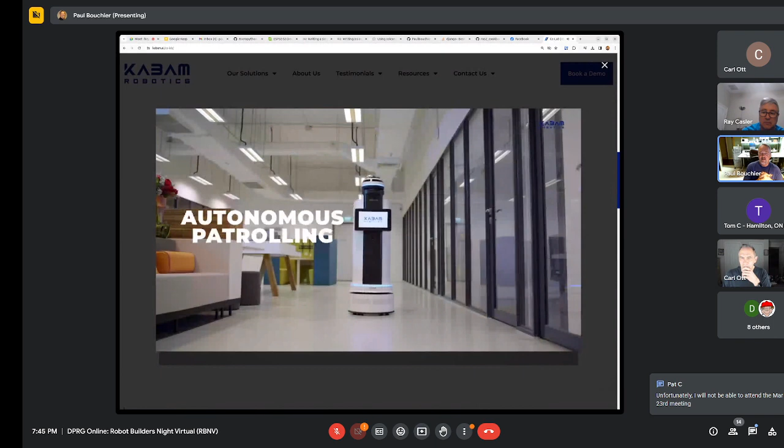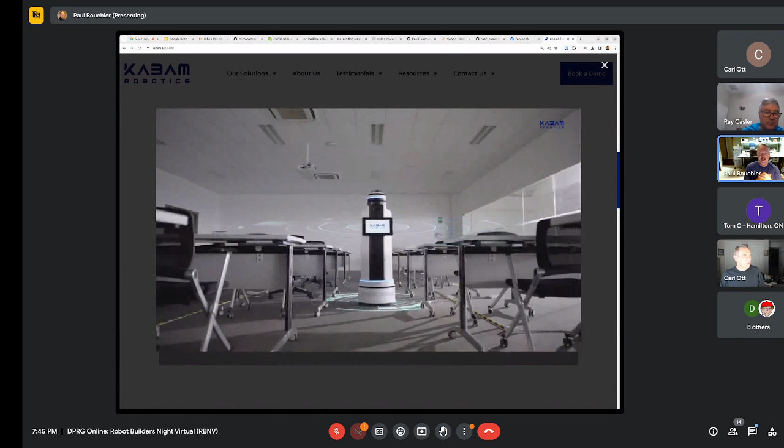An indoor and an outdoor security robot. So this is some imagery of the indoor robot, and Rob is the VP in the U.S. They're expanding their operations in the U.S. Rob is going to offer us the opportunity to tour their experience center, where they'll actually have a physical Collab, and Halo is their outdoor security robot. We'll be able to look at them, and he'll be explaining them on Saturday the 23rd.

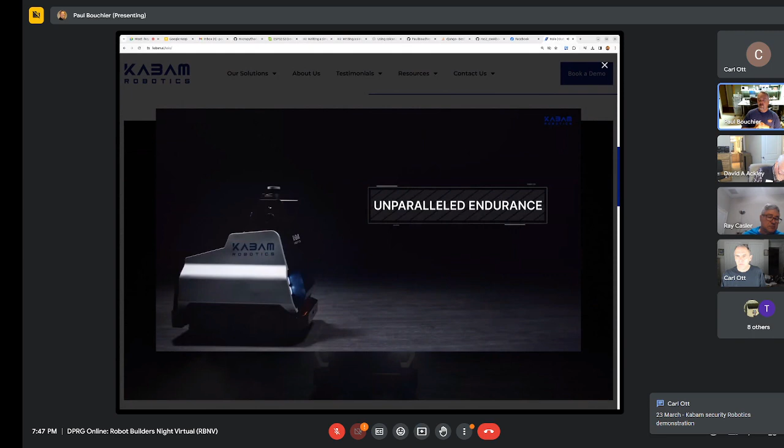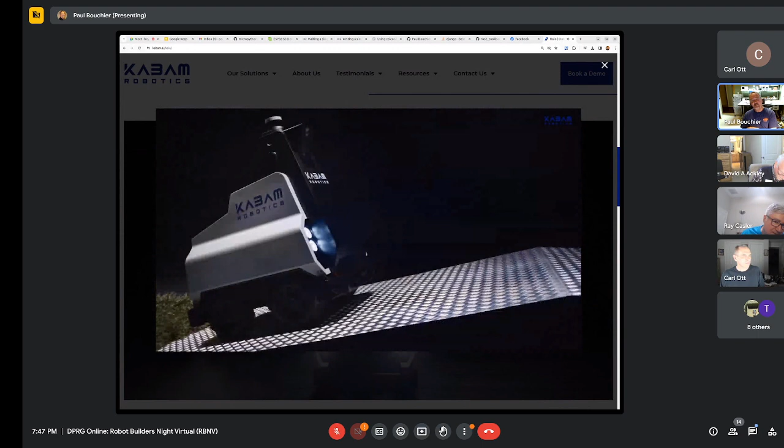Both of these robots are hosted by a back end, and you saw the word SMART popping up quite frequently—that's the name of their back end that monitors the robots, where they are, and alerts, with a whole cloud infrastructure. I think it'd be a really interesting talk. Clearly they address some of the things we try to address in our robots, things like rough terrain and navigation outdoors and indoors. I don't know any more about them than these videos, but I think it'd be really interesting to learn about them.

Is that a barrel poking out the front there? No. Maybe all too soon, unfortunately. Yeah. Does it kind of look like a Doctor Who robot, one of those Daleks? At some point, don't they all, right? If it is a barrel sticking out the front and somebody gets injured by it, is that an industrial accident waiting to happen? No operator in control, right? It's autonomous. Makes it a piece of equipment. Unless it's a Dalek, in which case it has the remnants of an organic brain inside.

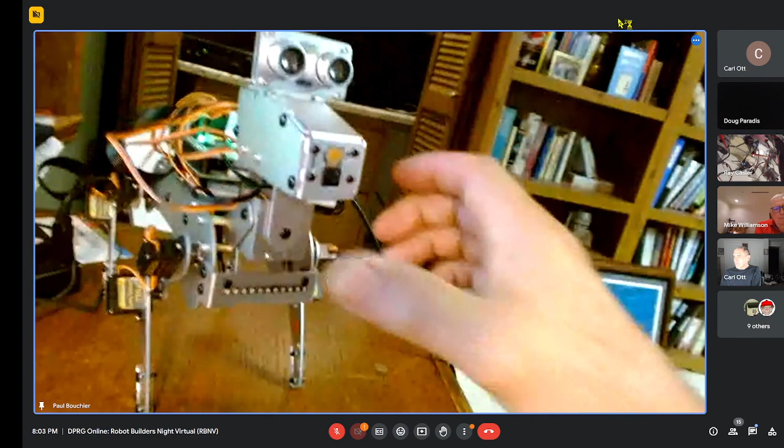So let's see, a few of the things he does are set... and responded to your command. Wow — only because I'm typing in another window. Oh okay, it does have, can do voice commands. Did you know that, Paul?

Yes. Okay, this is lie down with hands out. Let's see, the stretch is kind of fun, and then you can do push-ups. This is as far as I've got with this thing, Doug.

Can I drag it out across the carpet, or? No, it doesn't do that one. No? I would think that'd be a classic. Yeah, I know it would be.

Let me see if — have you tried to do the AI ones? No, okay, I only got it put together like the night before last, so I powered it up for the first time yesterday. Well, how about your ultrasonic, is it running? I don't know, I haven't got any — see, that's my problem right now.

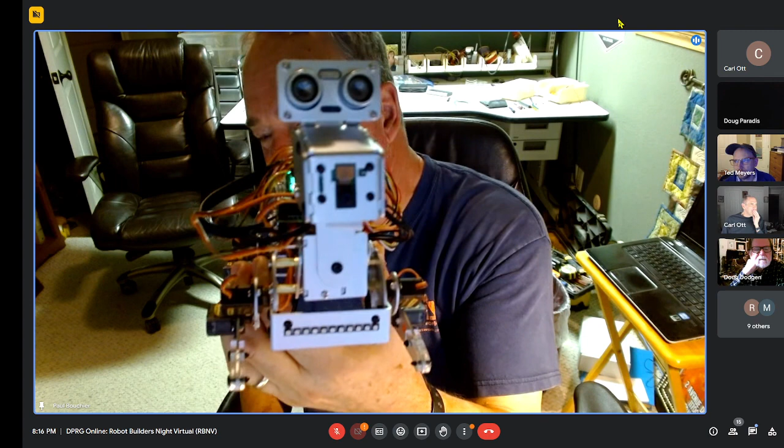Yeah, they did a really good job. You got how many, 12 servos in it? And one of them's the tail, so that's not as big a deal. They essentially, you set all 12 of them to neutral, and then you move them into a sort of sit down position like this, and they have a little program that allows you to adjust them to make incremental change in each of the different ones. I found it was necessary because the splines on the servo head don't let you set the arms exactly at right angles. So it's like Doug says, it's a kind of fine tuning mechanism, and they must store away some parameters in a file somewhere. And I was saying, considering how bad that could be, they do an excellent job in letting you set up all of those things.

Pretty cool robot. So anyway, the control software is strictly their app. You don't have access to the programming. Well, no, what they do is they provide you, I believe it's in Python, isn't it? Yes, it's in Python. So what you have is essentially a library of moves. Okay, so like go forward, you have a subroutine that's go forward. If you want to turn left, there's a subroutine turn left. And there's a subroutine to turn right. There's one for it to sit down. There's one for it to lay down.

There's one to lay down with its legs extended, one to stick its butt in the air, one to stick its head in the air and howl. I mean, about anything you would want to do, they have a subroutine for. Right, but how do you call these subroutines? Do you type into their app, or can you have a program that makes decisions? Well, it's Python, you write your program if you want it. So it's strictly Python from the command line. Yeah, I'm just saying, in theory, I'm sure if you wanted to, you could look at one of the subroutines and figure out, I mean, they're obviously passing the position of 12 servos.

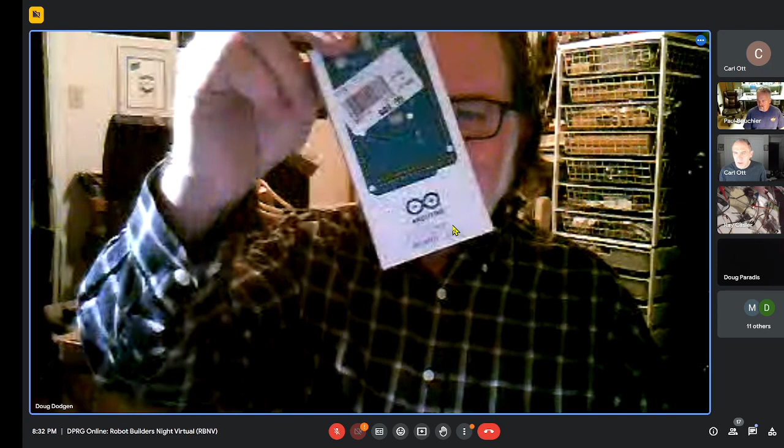I blew its serial connector on the Arduino somehow, and I went to Micro Center and got 2 more Arduinos so I could replace it. I got the Raspberry Pi 4 and Raspberry Pi 5 just on impulse, and I got this fan for cooling the Raspberry Pi 5. That whole price of stuff was about $200.

Your RoboDog is $179, and it actually does a lot more than this stuff I got in my hands here. And it looks a lot better than that thing behind me, which I've worked on, and it's kind of cool. It's version 1, and I've learned some things, but I don't know if I'm going to repair it.

I got the Mega so I could replace it and keep going. But I'm wondering, after seeing your new toy, if I can get that done by April 6th to put it on my back. That's not nearly as heavy as RoboDog over here - that's 20 pounds. I've tried it, and it's wearable, but I wouldn't want to wear it all day.

So that's my story. But yours is bigger. Bigger is always cooler. But yours is steampunk. Well, maybe I can steampunk up that other one - it's just a starter thing, you can put something over it. And Doug, yours is scratch built. Let's be clear - yours is scratch built, so there's some energy and love in that one.

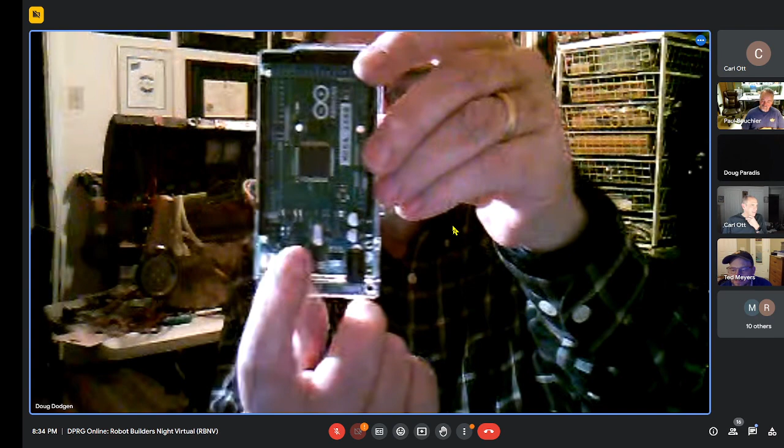Yeah, that's version 1 love. One should not minimize that. I will probably replace the Arduino just because I've got so much other stuff in there. I was so frustrated the other day - there's an RxTX light right here that shows the serial communications, and they don't work anymore on RoboDog. It quit right in the middle of a command, so somehow I burned something out there. I can just unplug that one and plug this one in, and it probably will start working immediately again.

I'm sure I will try that in a day or so. It took me a while to get over being frustrated. Every time it dies, I keep saying, well, that's the last one, let me go dig a hole. But then I keep saying, I can't give up.

That's not the kind of guy I am. Hey Doug, is everything else on it working? The rest of the dog works - it lights up, the controllers work, but the thing does nothing because it depends on the serial commands from the Pi to the Arduino to do everything.

Well, I'll be honest, those Arduino boards are pretty damn tough. This is the first time I've had trouble, but I verified it when I plugged the computer in to upload the program - it starts to upload and never finishes. Those RxTX lights never flash. On the new one I just bought, they do flash.

One thing - how are you powering it up? I have a 9-volt on the Arduino, they have this 9-volt plug-in, and I have 9 volts going to it. Okay, whenever I've had an Arduino issue, whether Mega or Uno, it's always been the LM1117 - or is it 1.7? No, 1.5. Anyway, it's the power supply chip, the linear regulator, and it goes bad.

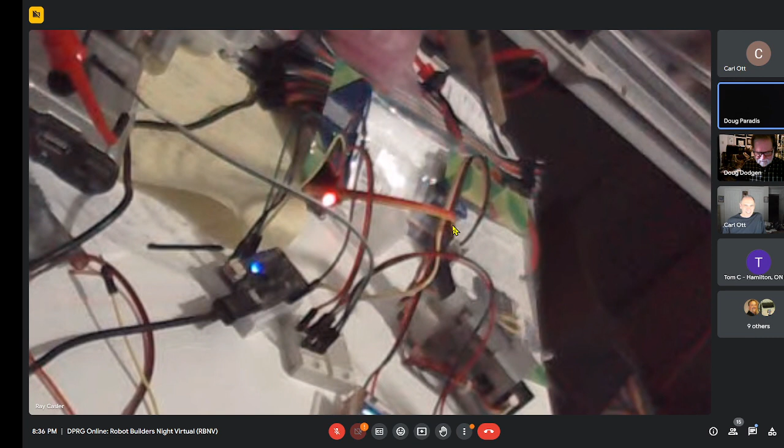$50? That may seem like a lot more to some people than it did to me. I bought 2 of them just in case I blew one out. $50? They're not $50 each, are they? Well, that's the Mega, yeah, those are pricey. Wow, but was that an official Arduino one? The full-on branded ones, yeah.

How much was your Pi 5? Yeah, I did get the Pi 5, and that was $79.99, MSRP, that's what I paid for mine. Yeah, the Pi 4 was $74.99. These were both 8 gigabytes, so more expensive than the cheaper version. I would have just gotten 2 5s.

Hey Doug, I mentioned I hear the 5 has some differences - I wanted the 4 because it'll do what I want right out of the box. The 5, I have to figure out what the changes are. Well, run it through Docker - that's what we did for the workshop. Yeah, but if you don't know Docker, that's another stair to climb.

I haven't played with Docker yet - I've thought about it but never done it. Same with ROS, I keep thinking about it but not doing it. The 5 doesn't support ROS straight out of the box, and Docker doesn't either - they don't quite have it ready for prime time. So I bought one just to play with, but I don't think I'm going to use it in anything right now. I figured as long as it's out there and they had them, I'd get one.

I've had pretty good luck with the Inland clones - they're like 20 bucks for a Mega. Where? At Micro Center. I got this Mega at Micro Center for $48.99. Yeah, but that's an official Arduino, I think. Yeah, one of the other ones.

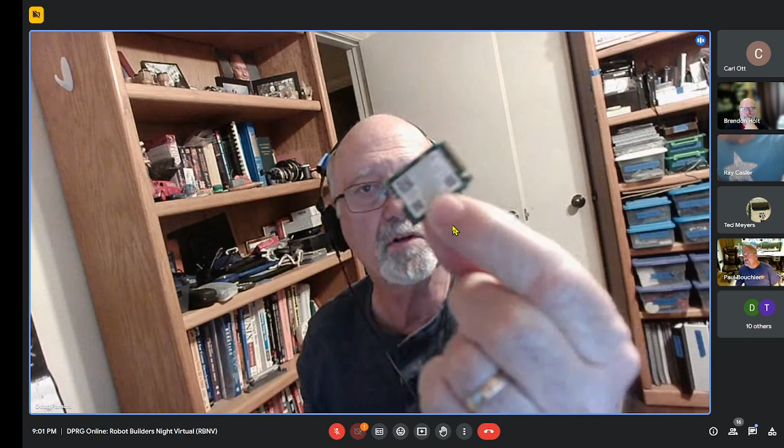Yeah, I'm using these little 2230 format boards. This one I think is 128 gig, which is fine for this stuff. But you can use, like you said, all the way up to this one. The Pimoroni will go up to a 2280, which is I think what Brendon's got. Yeah, it's full size. Yeah, and these things are only about $10, $10 to $15, so the drives are cheap.

And if you're buying them from Amazon, what you do is try to fill them up, and look at how the controller handles the cache. If you have good speed at the beginning and all of a sudden it slows down to a crawl, send that one back to Amazon. I can put a link for one that I found that's a good deal. I've bought about 4 of them for different things.

I've been using the Orange Pi 5, no matter which version you get, Pi 5B, 5, or 5 Plus, all have this port built in. The Orange Pi 5 looks like a great board, I'm still screwing around with it. But if you're used to the support you get with a Raspberry Pi, you're going to be disappointed because it's just not there, even though it looks like a great board. So anyway, I'll put that link in.

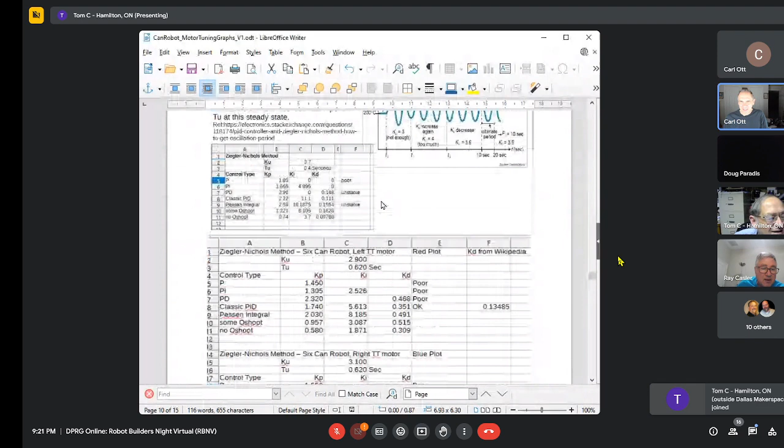Okay, this one, let's see if this will work. And it's been a few weeks since we've had a good PID loop discussion, so bring it on. Oh why not, right. You can see that, I assume. Yes, okay. I've probably talked to this group before about learning a little bit about how to use the Ziegler-Nichols tuning method a few years ago when I first started to use speed regulators on a robot, and this is the approach I started to use. I can talk about that some more later if anybody wants me to. I had a little presentation on it from when I did my tri-robot.

I applied that to the robot I'm currently working on for the 6-can contest in order to get some starting points for the coefficients for the PID loop. The two motors I've got turn out to be different, so these tables show the values that I got from applying this manual tuning method. It's one of the simpler tuning methods around, and depending upon how responsive you want the PID loop to be, you can pick various values here.

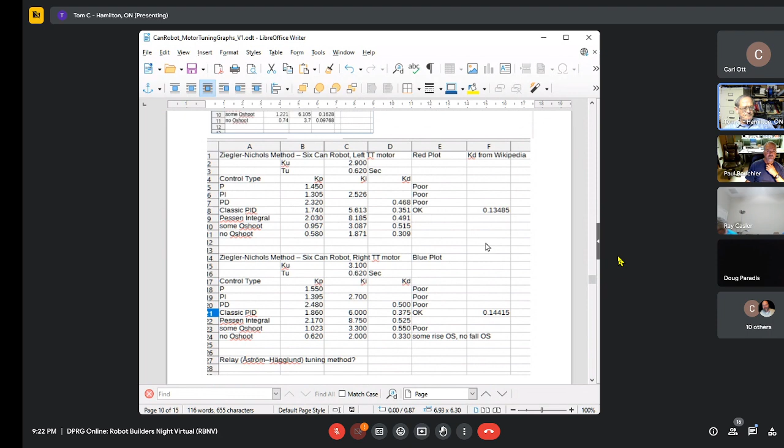I usually go through and try them all because they're fairly easy to use. They're starting points, not perfect PID parameters. When I applied them to the two motors, I got results like this. Not great - the overshoot and undershoot still need to be manually tuned out, but it produces very good responses to a step input in speed reference. So I ask it to go to 100 RPM and it goes to exactly 100 RPM. It just overshoots a bit and then undershoots when I turn it off.

So it's not bad. You can ignore the funny green lines at the bottom - that's just other things I have as I'm tuning the loops on this Arduino. It gives me a better timeline for what's happening.

So I thought, rather than mess around manually tuning these things, because I'm never very good at that, I have occasionally run across references to auto-tuning software for tuning PID loops. I thought I would look into this a little bit and see what happens. When I researched it a bit, I quickly ran across three of them.

One of them is called S-Tuner, provided as part of the Arduino library package. It looks fairly complex, so when I tried to find out more about examples of usage, the only ones I could find in all the forums were people using it in temperature control loops - closed loop temperature control, usually for beer making apparatus. That's all I could find. Nobody seemed to use it for anything else. It's pretty complicated, so I looked on a bit.

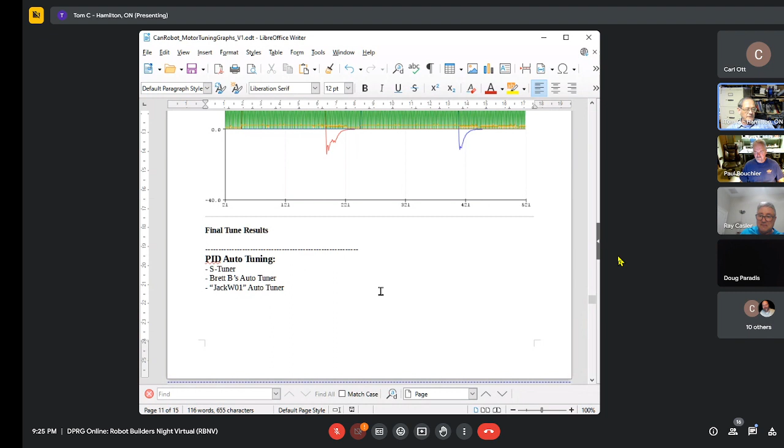So I ran across this third one, which had a few good reviews. It's relatively simple - only a small number of parameters to set up, and it was easy to add to a version of my code so I could run it as part of the software package on my Arduino. So I ran it.

When you run this thing, basically with the parameters you give it, it simply gives your motor a reference, monitors some results, turns it off, and then gives it some more references. It does this 8 times in a row. The blue line is the speed reference, and the red line is the speed measurement, which it's looking at to get some feeling for the response of the plant you're trying to control. This doesn't look bad - this looks like it's okay stuff. I ran it several times, which is why you see a couple of graphs here.

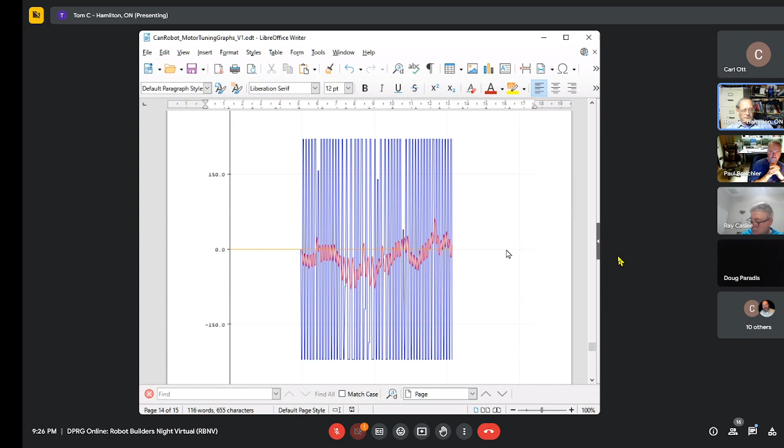So when I ran this thing a bunch of times on each of my motors and took a look at the data - here we are. I took the PID parameters for a no overshoot solution, and this is what I got when I tested my PID loop. This is horrible. This basically says, give it a reference, and the speed just goes crazy. This thing oscillates like mad. It's a highly unstable set of starting PID parameters. So I was extremely disappointed.

It kind of reinforces what I've been reading, that auto tuners are really hard to get to work right and aren't that good anyway. For what it's worth, these are the PID parameters this auto tuner gave me for a condition of basic PID, a classic PID loop, and what's called no overshoot. I used the no overshoot values and ran this multiple times. The PID values it produced seemed reasonable.

They seemed consistent at least, so I averaged them out and used the bottom set in order to test the motors. Produced really, really awful results.

So the end result here is certainly this particular tuner, which if you look in GitHub and search for Jackw01, you'll find the code and his extremely sparse write-up. I wouldn't really recommend it.

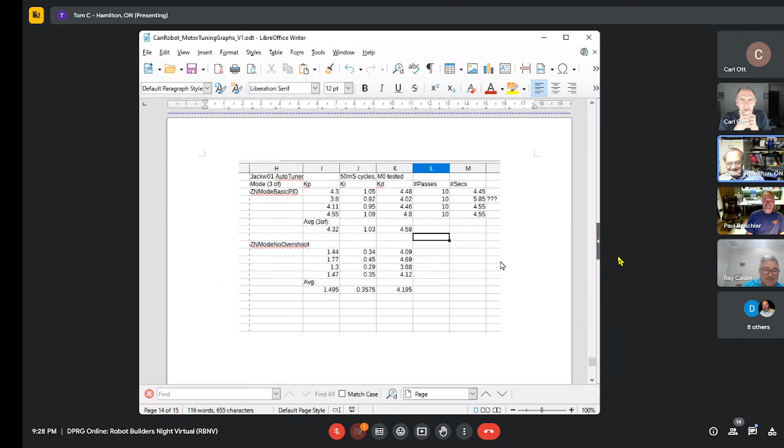That was the solution, I tried it, it fails, I don't recommend it. Tom, hey, can you back up to the last chart you showed? I'm wondering here when I look at that chart, because of the time scale, and when I see those kinds of dropouts in the blue, and I think you said the blue is the reference. Well, it makes me think you've got a sampling rate problem, because if the blue is the reference, that should be a nice, regular, clean signal, right? And if whatever you've got is not putting out a nice, clean signal, it suggests to me that either it's not sampled properly in the way that it's creating that signal, or whatever mechanism you're using to measure the thing is not measuring it right very well.

Now, Carl, this was my normal PID loop with the new set of 3 parameters in it. And when I say my normal PID loop, I mean the PID loop that produces this with the parameters I got from the manual ZN tuning method. But I still come back to the, even this, the time scale, when I see time scales that hint that something's undersampled somewhere, I wonder if the problem is not necessarily in the algorithm, but perhaps in just a sample rate mismatch.

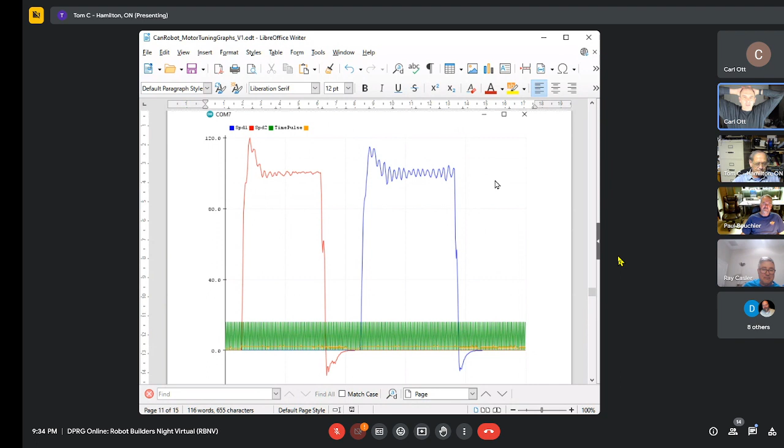Okay, but that's fine. But think about this, right? It's like a fundamental Nyquist violation, because you generally want the sampling rate of the controller measurement to be at least twice what the plant is. You want the controller to be able to control and measure much faster than the thing it's trying to control and measure can respond.

Otherwise, just think about having this wet noodle on the gas pedal of a Lamborghini or something. So your suggestion is when I run the auto tuner, I should run a much faster controller and see what happens, run the auto tuner at a much higher sampling rate than the other thing. Just put them in separate loops, right? Decouple the timing. Run the auto tuner at a much higher rate. They're two completely different programs, so I can do whatever I want.

I'm really curious, that's a good idea, Carl. I never thought of that. Got me going. Thank you. I would highly, before throwing mud at it, test it that way. And hell, if you can control it 3, 4, or 5 times faster, let's see what it does. Anyway, for what it's worth, I was a little unhappy. No doubt, yeah, so bouncing it off you guys is useful. I may actually try and run it at a faster sample speed.

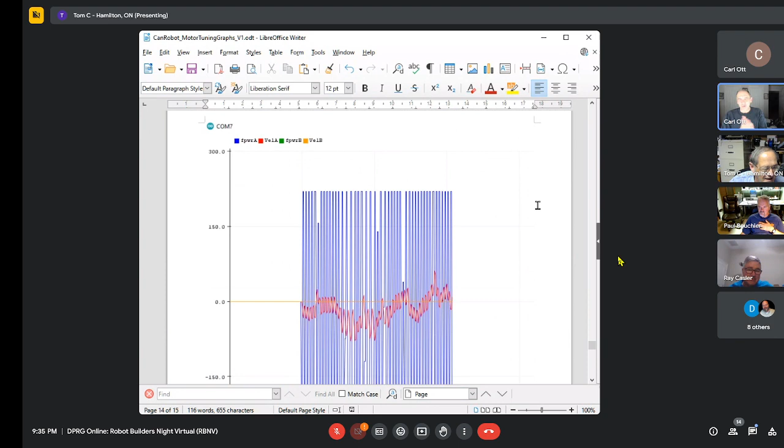Oh, this is cool. And I think that's all I've got here.

I did mess around with trying to improve the wheel encoders on my TT motors, but without particularly great success. I took the mechanical wheels - remember when mice had balls in them that rolled around, and those balls drove those lovely little encoder wheels inside, and they collected lint? Well, I pulled one of those apart and got a really nice set of wheels that fit nicely on the ends of the TT gear motors. And I pulled out the optics, the optical sensors used, which are really nice integrated units, hooked up an amplifier, got the whole thing running, and then realized that the TT motor gearbox is so sloppy that it can't keep the little tiny width of the slots lined up with the sensor.

But I took it all apart and put it back the way it was. It was a fun experiment. If the gear motors had been not so sloppy, then it would have worked out really well. But it needs quadrature encoders and a whole lot more slots.

Anyway, so I have found devices that - let me drop this, stop presenting. I'll present something else, maybe. And window.

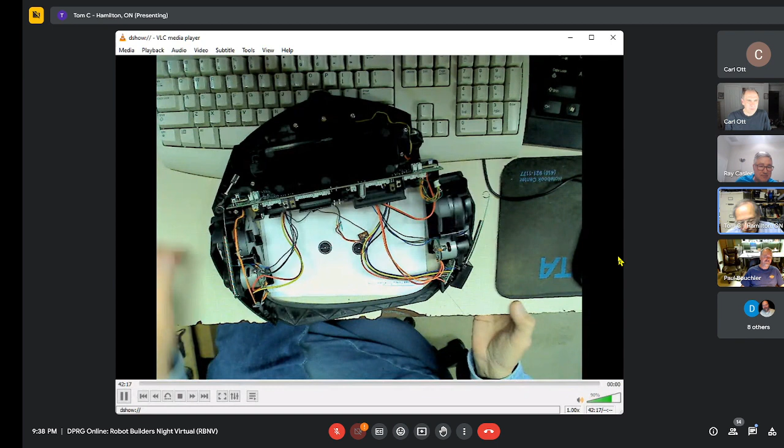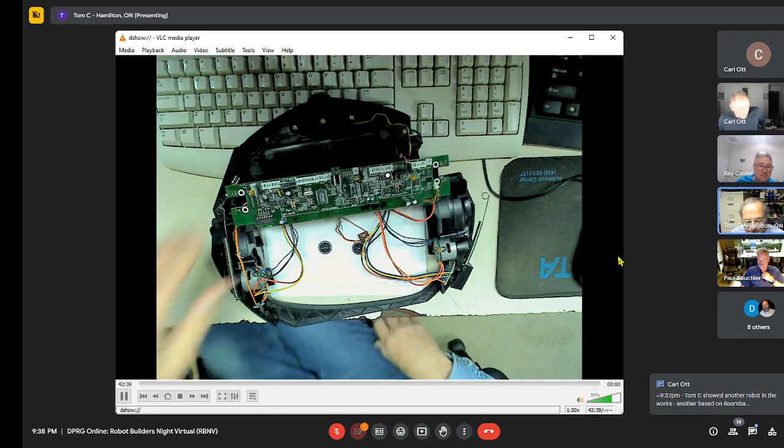Tuners. So onwards and upwards, it's always good to have another robot in the works. In my collection of Roombas, this is a clone of a second generation Roomba, which I have pretty much completed gutting. My goal was to keep the frame, keep the motors and gearboxes and the speed sensors, and maybe I will keep the H-bridges, we'll see. It doesn't look very complicated. Plus, there appears to be some fancy circuitry to condition the wheel sensor outputs. So I may hang onto that stuff and hacksaw it off of these boards, and we'll see what happens. But that may well turn out to be my next robot.

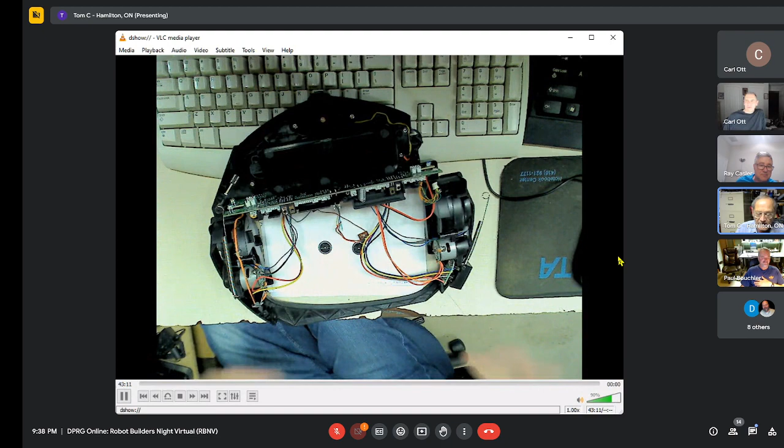The interesting drawback is the sensors in these wheel assemblies have extremely high pulse rates - there are 600 or 700 pulses per wheel revolution, but they're only single phase. And I did some research on the entire generation history of Roombas, and they never used anything except single phase encoders in the wheels. I was very surprised at that. Huh.

Oh, those are the little discs I took out of the mouse. So Ray, you're muted.

Let me close this. So I was quite surprised that there's still only a single phase encoder inside those wheels. We'll see where I can take that.

That's it. Cool. Well, if you're always going one direction, there's no advantage in having two phase. But don't Roombas back up?

Yeah, but they stop first. And that makes sense. That's the way the logic works with a single phase encoder to get true velocities. You have to validate that you've got logic that knows the motor stopped, and now you can go the other way. That's what I've got in the logic I've built into my existing robot, which is only single phase. I found even if you're just going one direction, you can get on an edge and it'll flip back and forth and it'll think it's moving when it's not.

No hysteresis, huh? Yeah, you need some hysteresis. You need enough bits to throw some away.